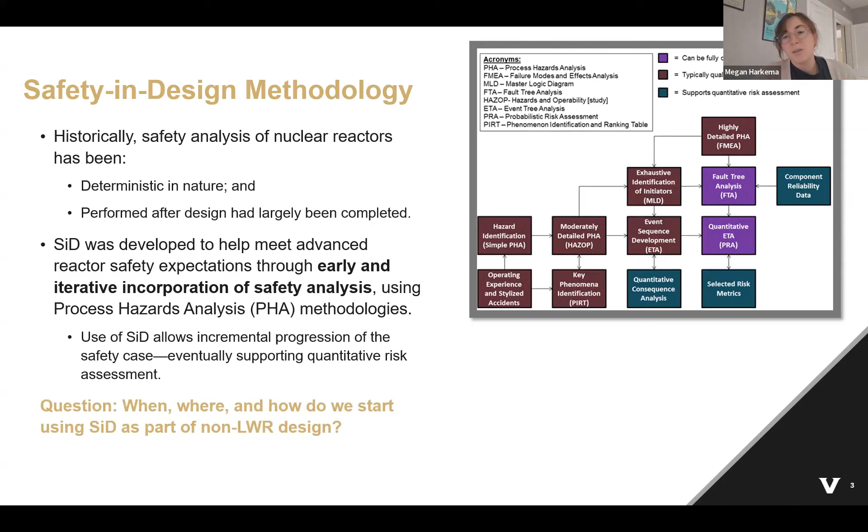But again, that begs the question of when, where, and how do we start, particularly for non-LWRs. I do have some related references here. Since this is going on YouTube, feel free to pause the screen and look at those references on safety-in-design if you are interested.

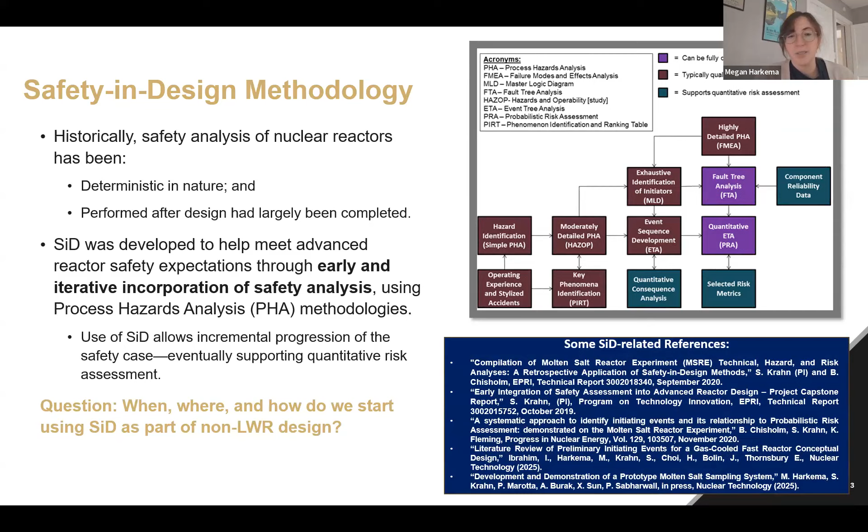So let's dive into the first question, which is when do we start? Our research has shown that there truly are benefits to starting as early as possible. But when we're starting early, we need to be thoughtful in our approach.

Process hazards analysis methodologies are the tools that we use to perform the SID method overall. They were developed for use predominantly in the chemical process industry as well as the aerospace industry, for systems that may not require a full probabilistic risk assessment. They were designed to be flexible and evaluate hazards and risk in different ways than we traditionally think about it for the nuclear industry.

However, all PHA methods are not created equally. We need to be thoughtful when we choose our PHA, particularly for analysis of a high hazard system at early phases of design.

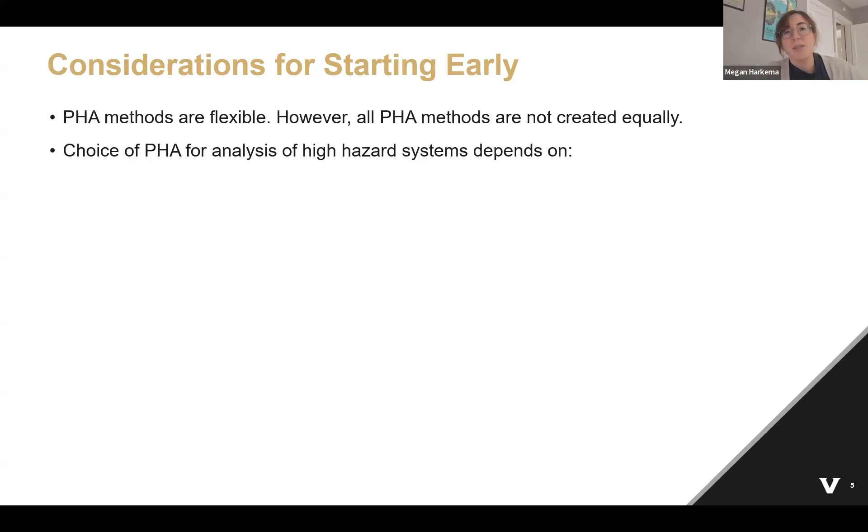In terms of the considerations that go into selecting PHAs, I've lumped them into two categories. The first being some of the logistical questions: what are our objectives, how many resources do we have available? Is this you sitting in your cubicle performing the evaluation, or do you have a team of design, operations, and safety analysts willing to collaborate and take as long as it takes? Do you have the appropriate documentation, the appropriate computer software to perform these evaluations? All of that really does end up impacting your selection.

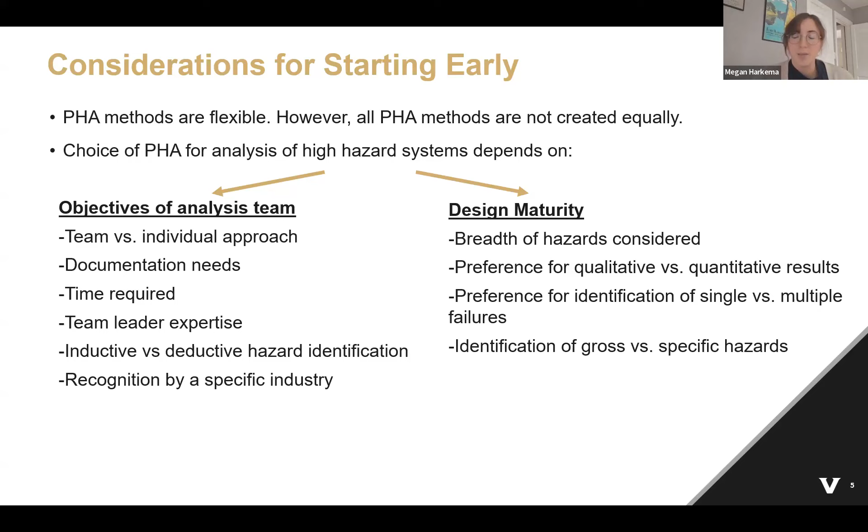What I'll be talking about in detail during this presentation is the second category of considerations, which has to do with design maturity. Depending on the design maturity in question, there are different breadths of hazards you can consider. There's a difference in your ability to gain qualitative versus quantitative results and insights. At an early stage of design, it's probably best to identify single failures before you move into identifying multiple or common cause failures.

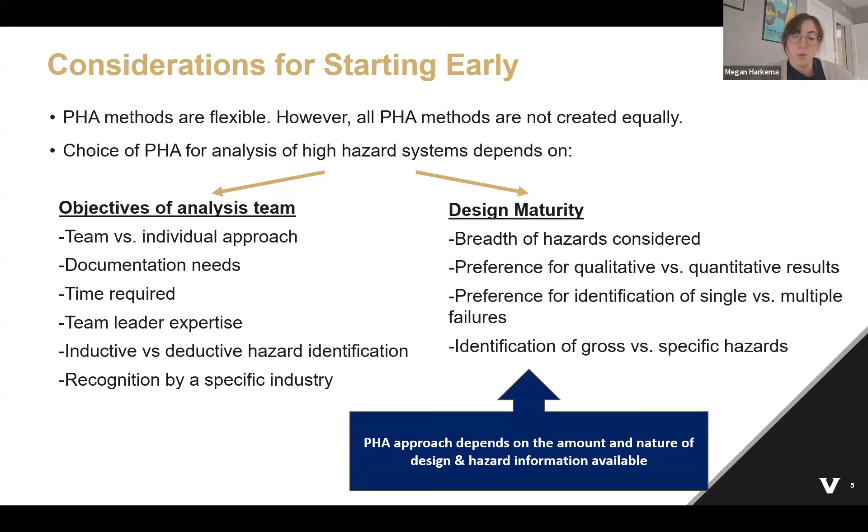So really what this gets us to is that the PHA approach we select depends on the amount and nature of design and hazard information we have available. But let's not forget this is intended to be an iterative process. If you don't solve all of your objectives in one go-around of implementing a PHA, that doesn't mean you can't consider them at a later stage of design.

At early stages of design, you can perform things like a what-if or a what-if checklist analysis, and get quantitative or qualitative understandings of your frequencies and consequences. As you mature, you can begin to use more and more rigorous tools to evaluate your system.

But that doesn't mean that even when you're integrating a simple process hazards analysis method into your safety analysis and design process, you don't need supporting information available. The easiest example is that if you want to perform a what-if checklist analysis, you need an appropriate checklist to do that. And let's be realistic, those may or may not actually exist in this day and age for advanced reactors.

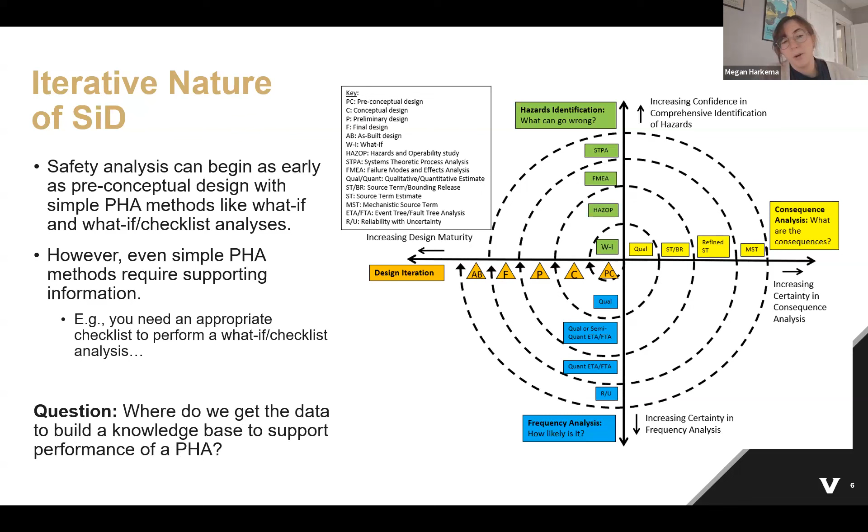So that gets us to our second question, which is where do we get the data we need to build a knowledge base to support the performance of a process hazards analysis methodology? My overall point, if you take nothing else home, is to do your homework here.

A lot of comments we get are, well, why are we doing safety analysis before we have the design specific data to do that safety analysis? The answer really is, well, there is data out there. You just may need to get creative in how you're using it, collecting it, and analyzing it to gain insights for the system you're responsible for designing. We've categorized data that can feed into the safety-in-design process into three different regions.

The first being operating experience data. This can be further broken down into historical operating experience or more modern operating experience. Secondly, there's stylized accidents—what we see a lot in the literature today, for example a Melcor analysis of a LOCA covered in a journal article or conference paper. And finally, there's relevant phenomenological data out there that can help us get a preliminary understanding of what phenomena might be of interest for our design.

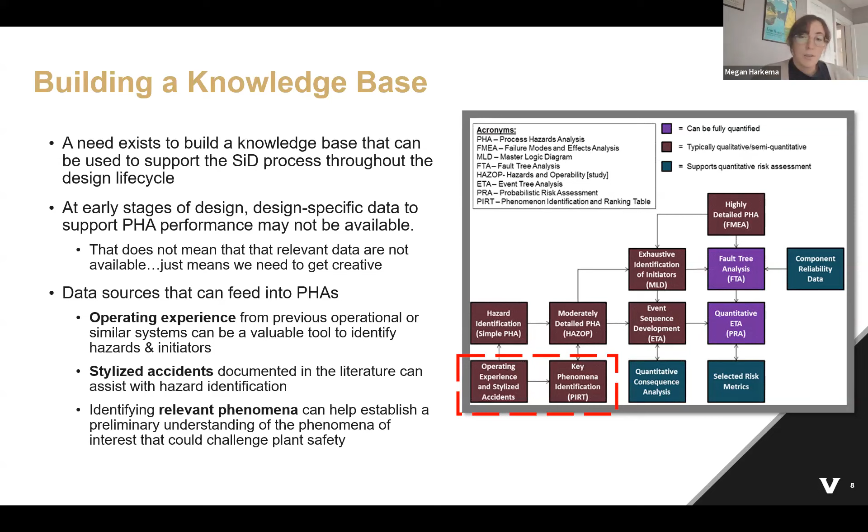Now I'll go into talking about these data categories in a bit more detail. The first one being historical operating experience. I would imagine most of us on this call are fairly familiar with the historical operating data that is out there.

From technically similar reactors tested at the Department of Energy and National Laboratory Complex between the 1950s and 1970s. What we've really seen in our research is that this reactor and test facility data and its documentation can be the most thorough manufacturing, construction, operational, and retirement experience out there for a given concept. But that does not mean that all historical data is created equally or that we're going to easily be able to access that data.

I want to spend a minute going over how exactly we can get access to this historical data, and I have these ranked from easiest to do to probably most complicated. We've had a lot of luck using web-based keyword searches, particularly at OSTI, as well as Google Scholar, for getting information about systems like the molten salt reactor experiment.

But for some other systems we've had to get a little more creative, going to component reliability databases. Some of those have been specifically built for advanced reactors, like the Sodium System Component Reliability Database, NaSCoRD, or the equivalent for molten salt reactors, MOSART. But we've also used generic databases like the Savannah River National Laboratory database.

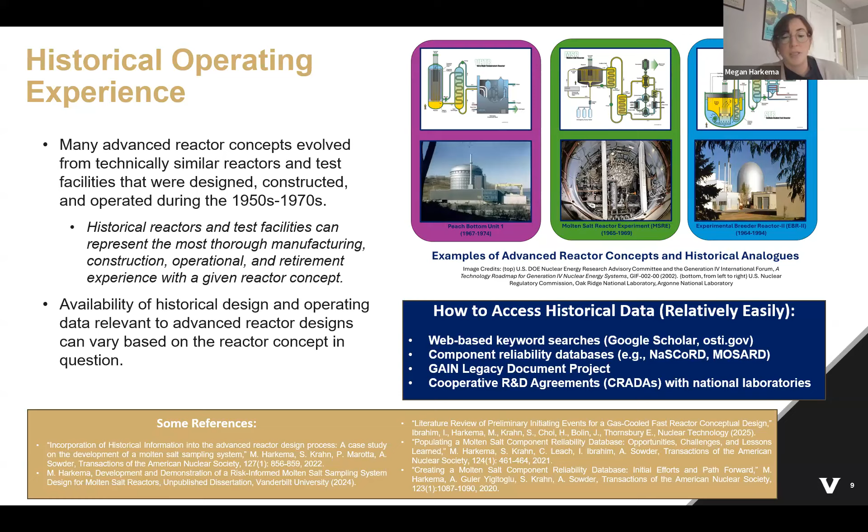But as I mentioned before, we do need to be careful using historical data, particularly if we're using it for our safety case. When we're using it in this way, we need to understand that what we're presenting in terms of our design and its performance will ultimately be sent to a regulator for their perspective and review. So we've identified a few factors we should keep in mind when designing a system and using historical data.

These can range from things like: how did you access the data? Is it publicly available? Was this system a one-off or was it well tested? And one of the most important ones for the safety analysis process is what is your understanding of the quality control and quality assurance processes used in collecting that data historically—was that QA/QC process documented? There are ways to retrofit QA/QC onto the data, developed out of, I believe, Idaho National Laboratory, and we can get you that reference if you'd like.

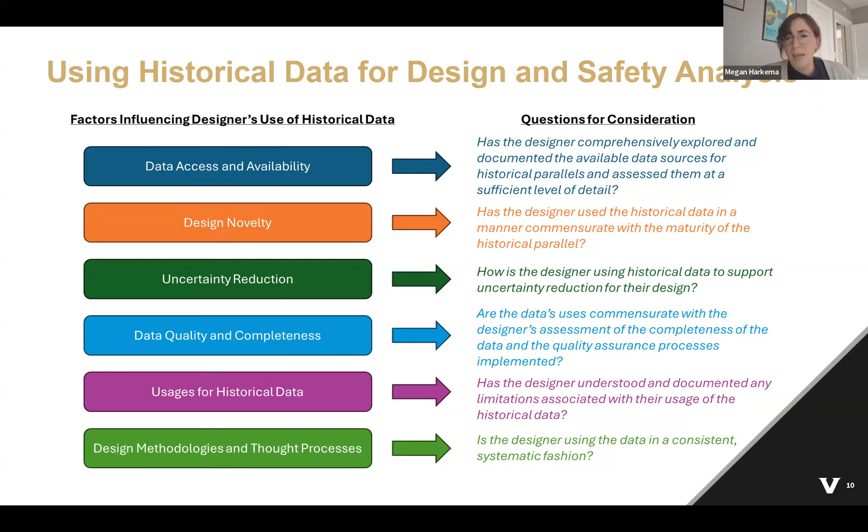But again, there are caveats here. Let's start with the easy one: if you're taking data from a quote-unquote technically similar system, similar does not mean the same. You do need to screen that data for relevancy to your design. We have done that previously using expert judgment as well as delta analysis if a more systematic framework is needed.

The other caveat, and this is something near and dear to my heart, is that if you're using data specific to your design that someone has been collecting, you need to actually go and collect and retain that data. So there's a need for intra-organizational collaboration and communication to make sure that the people developing a facility and actually running it are collecting data that you can use to support your safety case development and design development processes.

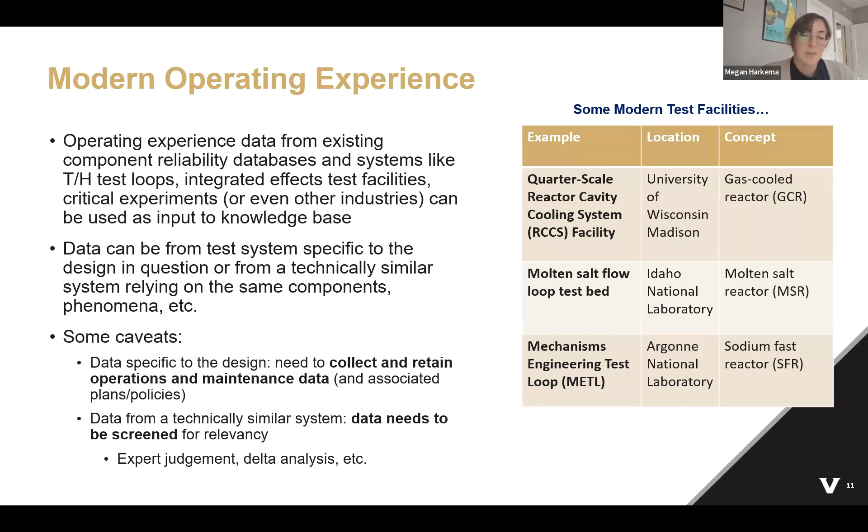The next category of data we have is stylized accident studies. I think all of us are probably well aware that there's so much stylized accident information out there in the literature for light water reactors and for a variety of advanced reactor concepts.

What we've previously done with this data is use it in an aggregate form. Although it's not a substitute for comprehensive initiating event identification, collecting this information comprehensively can help us understand undesirable events and how they propagate within our system, which can ultimately be used as part of the rationale presented to a regulator for the comprehensiveness of your initiating event identification process. The thing I really want to drive home is that this is not a trivial process, just because of the wealth of information out there.

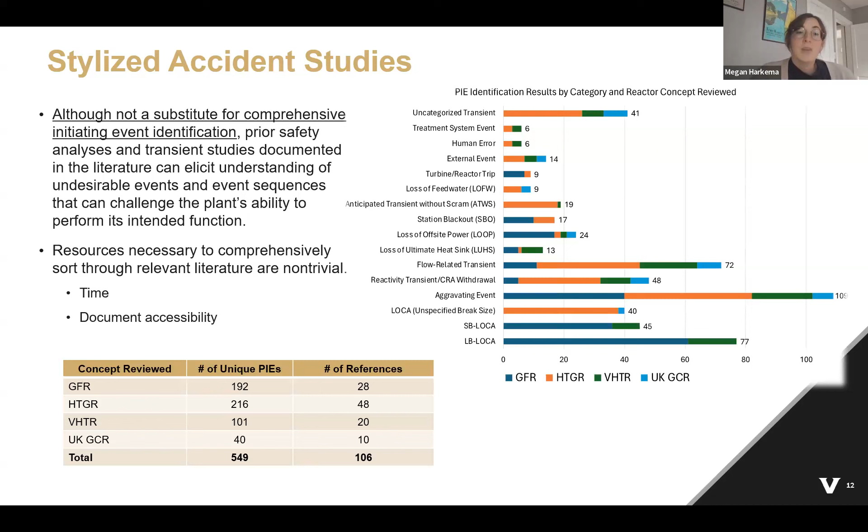It helped us streamline our safety analysis in the future and determine which systems hadn't been evaluated very well in the literature to date. But it is a pretty resource-intensive process.

The last category of data I'll discuss is phenomenological data, and I will also plug Brandon and Steve here for just a moment, being that they have previously put out information on the importance of considering phenomena specific to advanced reactors.

One good example here is the potential for flow reversal in passive decay heat removal systems. Obviously this can be considered in AP1000s as well, but it's something that may not necessarily have been considered for light water reactors traditionally.

What we've seen in implementing the safety and design process is that PHAs are great for organizing phenomenological data into event and accident sequences. But in and of themselves, they're not necessarily designed or well suited to identifying phenomena from the get-go. So this is where we pull in tools like phenomena identification and ranking tables to help us consider low-level phenomena.

But again, at an early stage of design, we're not saying you have all the data you need to actually go out and perform a PIRT. There have, however, been a wealth of PIRTs performed in recent years for almost every advanced reactor concept being considered, and those may be generally applicable for adoption at early stages in the process.

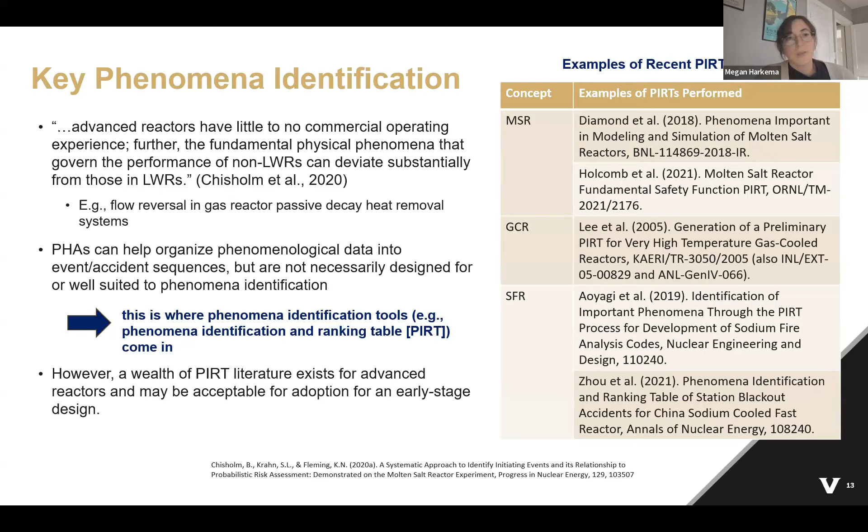All right, last question, and hopefully the most interesting of all of this: we have all of this data. Now, what in the world do we do with it? How do we use it to risk inform?

In a perfect world, I would have time to discuss in detail two different case studies that show you just how different this process can look based on your objectives and the environmental context you're working within. However, this is a 40-minute presentation, not an 80-minute presentation on this beautiful Friday afternoon, so I will go into detail on one of these.

But before I do so, I do just want to mention again the work we did as part of the General Atomics FMR project. In that case, we were evaluating an entire reactor.

Our goal was to develop an initial safety case for the reactor as a whole, and we were working within a historical context that was a bit different, in that no gas fast reactors have been operated. But there's a moderate wealth of experience out there for gas-cooled concepts generally, and also the passive decay heat removal systems being studied for gas-fast reactors have also been considered for advanced light water reactors.

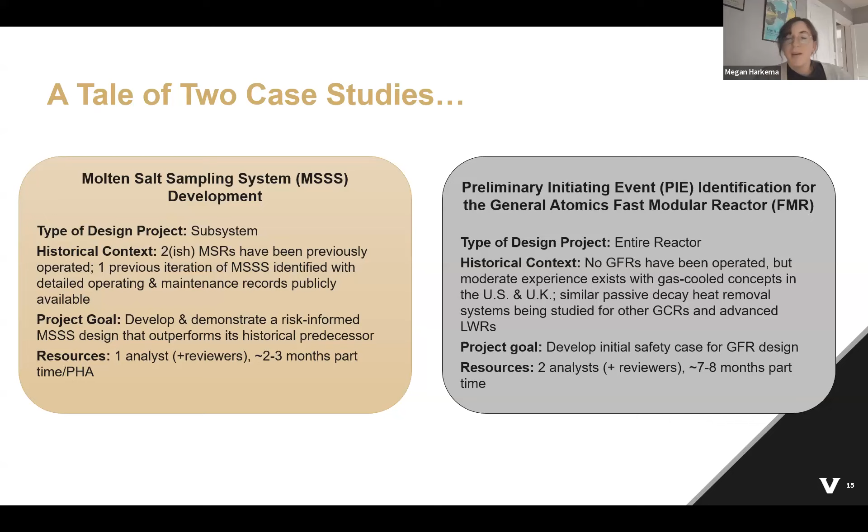And the resources we had available were two analysts, i.e. grad students, one of which was me at the time. We were able to dedicate about 7 to 8 months part-time to each of the PHA evolutions we performed, with a host of reviewers available to help us there as well.

The case study I'm actually going to focus on was my dissertation research, which was the development of a molten salt sampling system, or MSSS, for use within molten salt reactors generally. This project was funded by the NEUP program with the overall goal of developing and demonstrating a molten salt sampling system that outperforms its historical predecessor.

So instead of a whole reactor, we're looking at developing a subsystem. We have a bit different historical context. There were approximately two molten salt reactors, depending on who you talk to, that have previously been operated. And there was one previous iteration of the MSSS that we identified, and we found detailed operating and maintenance records, which informed our process. So in that case, we had one analyst performing about 2 to 3 months part-time per PHA evolution that we looked at.

We performed three iterations of the safety analysis process as part of MSSS development. The first was a STAMP-based analysis of the historically similar system. Then we moved on to a failure modes and effects analysis of our conceptual design. And then finally, we were able to develop what we like to call a semi-quantitative fault tree for our as-built prototype.

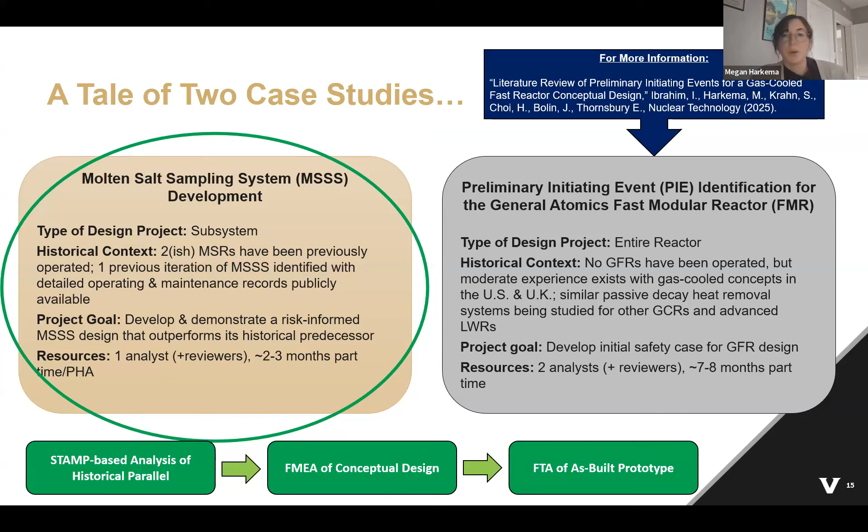But before I go into that, obviously the focus of this presentation is on the safety analysis process. But if you're anything like me, trying to move forward without understanding what in the world is an MSSS and why do we need one would be difficult. So I'll spend a few minutes just talking about what exactly is a molten salt sampling system.

Molten salt reactors are molten salt fueled or molten salt cooled reactors. The benefits they provide include higher heat removal or higher temperatures that allow for increases in efficiency and different deployment flexibilities, as well as potential safety and safeguards improvements. But molten salt reactors are sensitive to a few different chemical and isotopic considerations, predominantly given the liquid form of the fuel in question. So it becomes important for us to understand, predict, and control those characteristics.

Particularly within first generation molten salt reactors, experts perceive that this will require periodically removing small grab samples of salt, testing them for things like fissile and fertile consumption and production rates, fission product concentrations, contaminant concentrations, redox conditions, to make sure that your system is within its operational envelope.

The MSRE, which operated at Oak Ridge between 1965 to 1969, used a system called the sampler enricher to do this. But as I'll get into in a bit here, that system's reliability, as documented in the MSR program's semi-annual progress reports, was insufficient for us to directly incorporate that design into modern MSRs, motivating the NEUP project that we got to work on.

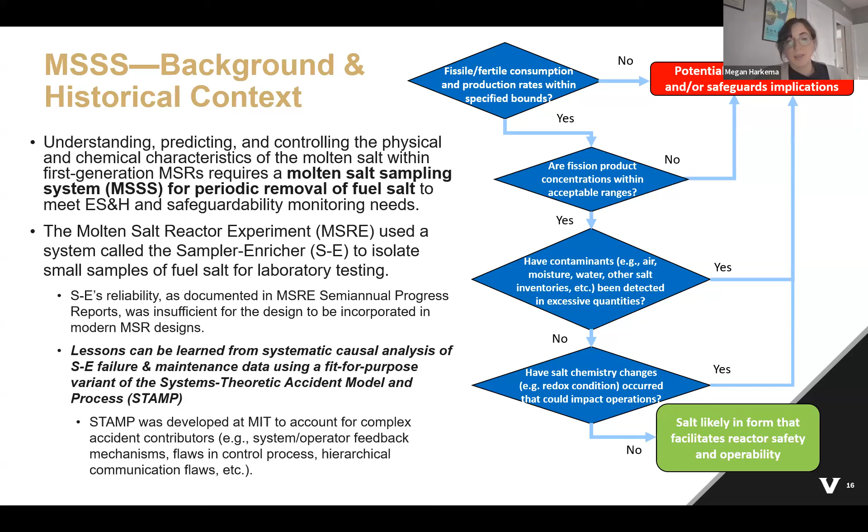When I was referring previously to the sampler enricher's performance, I think it's useful to spend a bit of time saying what exactly we mean by the system was insufficiently reliable. Within those MSR program semi-annual reports, we were able to tally up 744 total sampling evolutions that had been performed over 4 years, with the bulk of those being removing small amounts of fuel salt for laboratory testing.

Some of those evolutions were to actually add fresh fuel to maintain reactivity within the system. So this system operated, I guess I would say in my own personal opinion, quite poorly. So much so that the MSR program directors commissioned a report purely on the sampler enricher's performance at the end of the MSRE's operational period.

However, the project management description is a little more optimistic than my own, saying, quote, the system required some minor repairs. However, when we looked at this in detail, we were able to identify 64 different occurrences for this very small subsystem in, I guess, small reactor, which equates to more than one occurrence per month for the system, twice requiring the shutdown of the reactor to resolve.

In response to that, there were approximately 140 individual corrective actions performed. But alas, not all of these were successful.

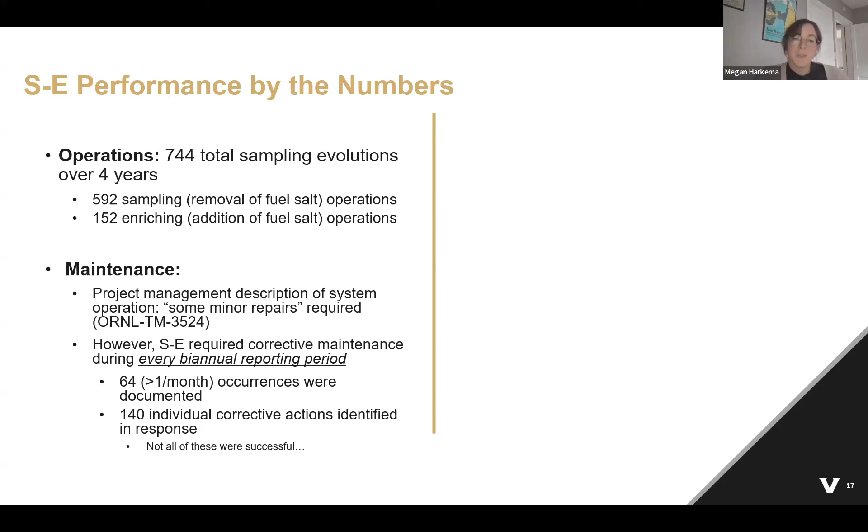I want to bring this back to the risk-informed, performance-based standards guidance document that ANS put out. They listed a number of attributes for a risk-informed process, and one of those is the use of thresholds or criteria to examine system performance. We received a qualitative requirement for this criteria from DOE-NE when we got the project, which was achieving a higher degree of reliability than the historical system. But we were able to use the evaluation methodology we did to turn that into a quantitative insight here.

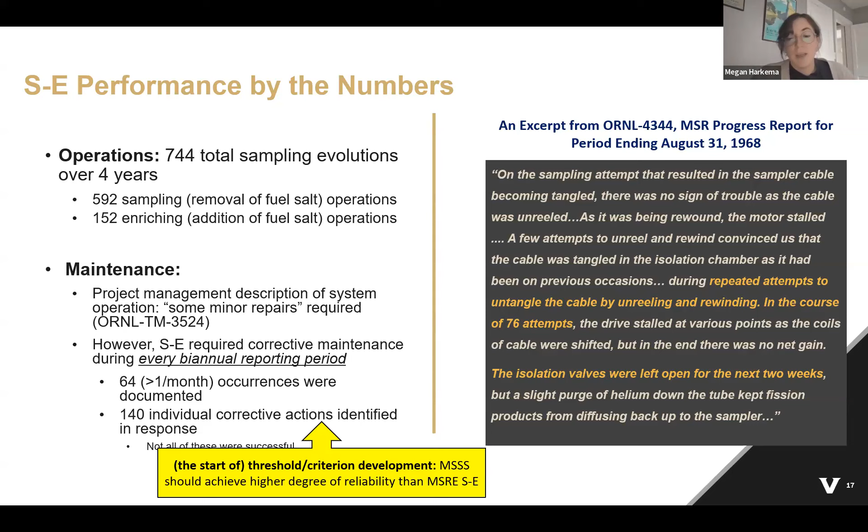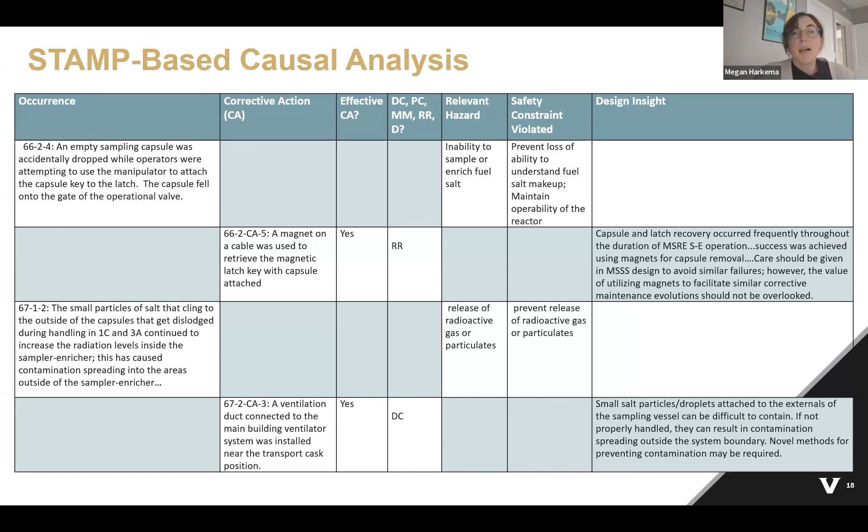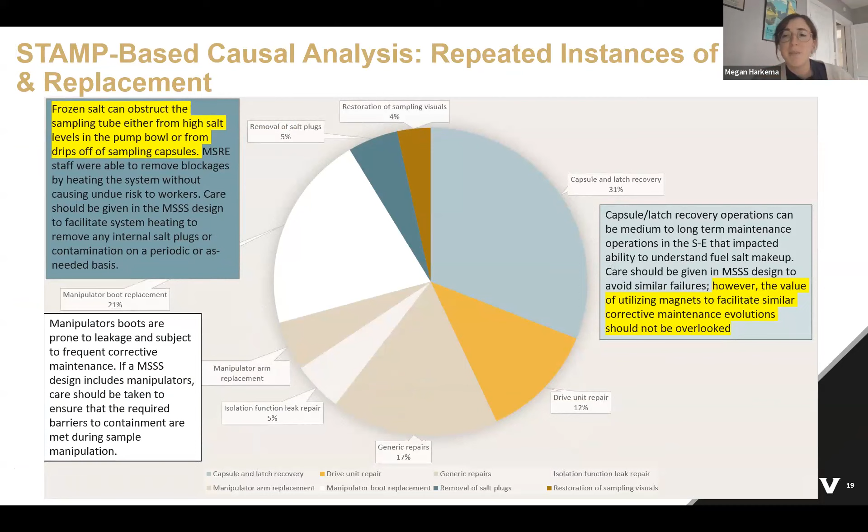That led us to analyze the frequently credited repair, replacement, and design change evolutions for further design insights, which is what you see in this breakdown of repeated instances of repair and replacement here. To save time, I'm not going to go into details, but the insights we gained allowed us to pull failure modes into the later-stage failure modes and effects analysis performed on our conceptual design, as well as giving us insights into how we could design effective mitigation and recovery mechanisms for our system.

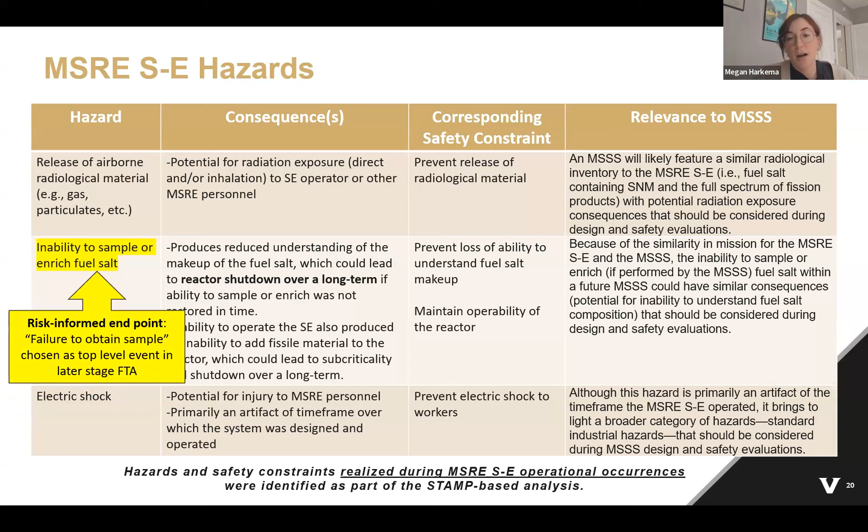Moving into the middle ground work we did, which was the failure modes and effects analysis of the conceptual design. Here's an example of some of the results we got from this evaluation. We identified over 331 total failures for what is realistically a pretty small system within a molten salt reactor generally.

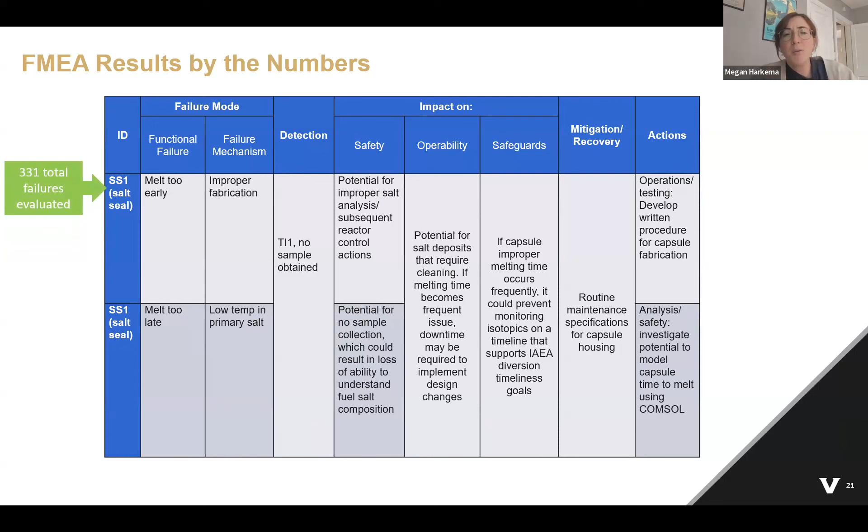From a risk-informing perspective, I want to focus on the use of these other columns in your failure modes and effects analysis to gain insights. The first is an aggregate examination of detection and mitigation or recovery mechanisms. If you look at where you have frequently credited detection, mitigation, and recovery mechanisms, that can tell you where you need those mechanisms to have a high degree of reliability, and where you might need to diversify the mechanisms you're using.

One example that's easy to discuss is if your detection mechanism is 'no sample obtained,' which it was 10 times for us. That means you're getting all the way through the sampling process before you realize a failure occurred in your system. So we went back and made design changes to allow us to differentiate between failures that could lead to no sample being obtained.

The other place where we can gain good insights from a PHA is the resolution of action items, and we identified 58 of them on our conceptual design. These can range from things like developing procedures or better defining the operational envelope, to performing a multi-physics evaluation of your system to better characterize its performance before you move on to testing.

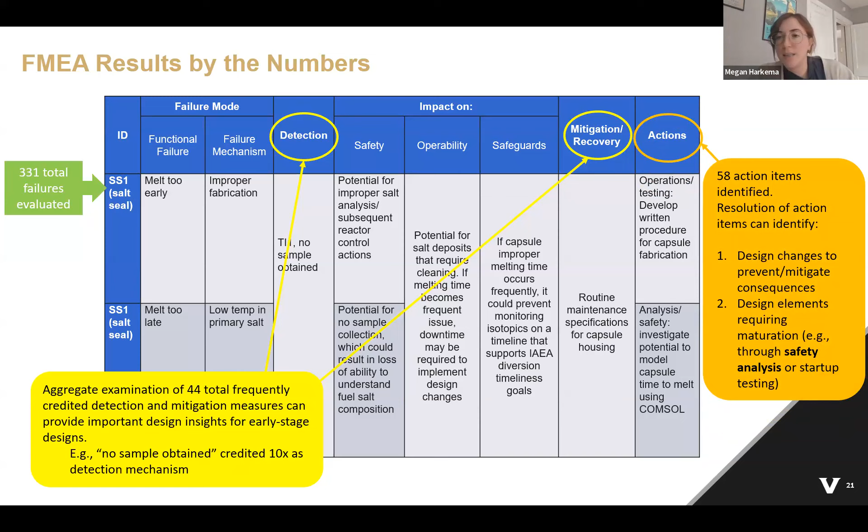I'm almost done now, I promise. The testing approach we used was multi-phased and allowed us to increase in relevant hazards being realized. On the left is our conceptual design that we were able to translate into a few different prototypes.

The thing I want to focus on here is how we used our testing to better understand the failure modes that could happen for the system and how that could lead to the overall top event of failure to obtain a sample. We had these different branches you see on the bottom that we were able to decompose, but the one I'll focus on in more detail is the freeze port branch that we developed and tested.

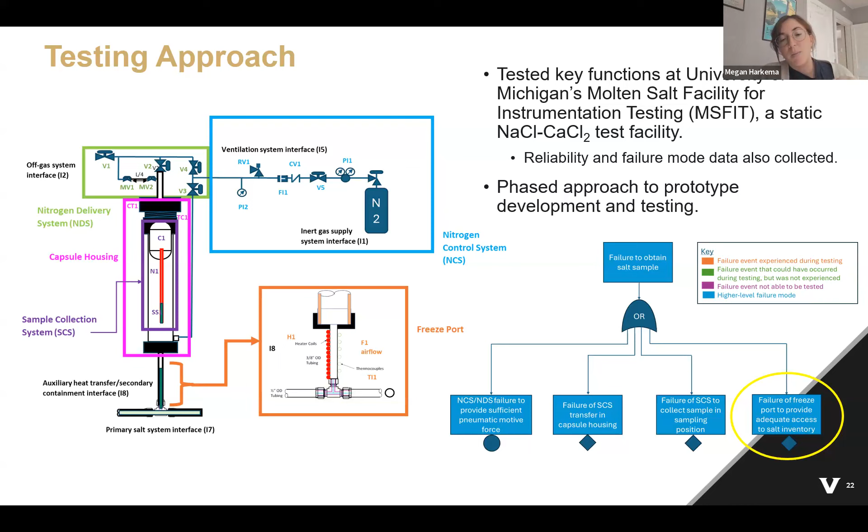A freeze port is similar to the freeze valves being considered for use within molten salt reactors, in that it's an alternative to a traditional electromechanical valve where a frozen section of salt acts as the closed valve, and you use heaters to heat and melt it when you need to open the valve. We call this a port instead of a valve because in addition to fluid flowing through it, we're also passing our sampling equipment through it so it can access the bulk salt underneath to get a representative sample for our evaluation.

We were able to create the freeze port test bed you see on the right-hand side here at the University of Michigan's Molten Salt Facility for Instrumentation Testing, or MSFIT, which for any of you who have worked with molten salts know is a very appropriate name for this facility.

This test bed allowed us to test a few different important areas for our freeze port: first, can we pneumatically control the level of salt in the port when it's in the open position, and second, can we use the thermocouples placed at different spots to determine when the port has been frozen?

This whole process occurred in, I believe, January of 2023, and we were able to test the system 2 times. Now, I'll be completely candid here—our goal was originally to test on the order of 10 to 20 times, but this was a COVID-impacted project, so we had to work with what we could. But the thing I want to drive home from the risk-informed perspective is our testing evolution allowed us to identify additional failure modes and start collecting some reliability-related information that we can bring forward.

We did this by creating a semi-quantitative fault tree where we went through and tallied the failures we had, with 2 overall sampling evolutions. We're not going to go through a full quantitative evaluation here, but what's helpful is we were able to color code this fault tree to show whether a failure event could have occurred during testing but didn't, could not have occurred during testing, or actually did occur during testing. This allowed us to start expanding this process in a way that will build toward a later stage safety case.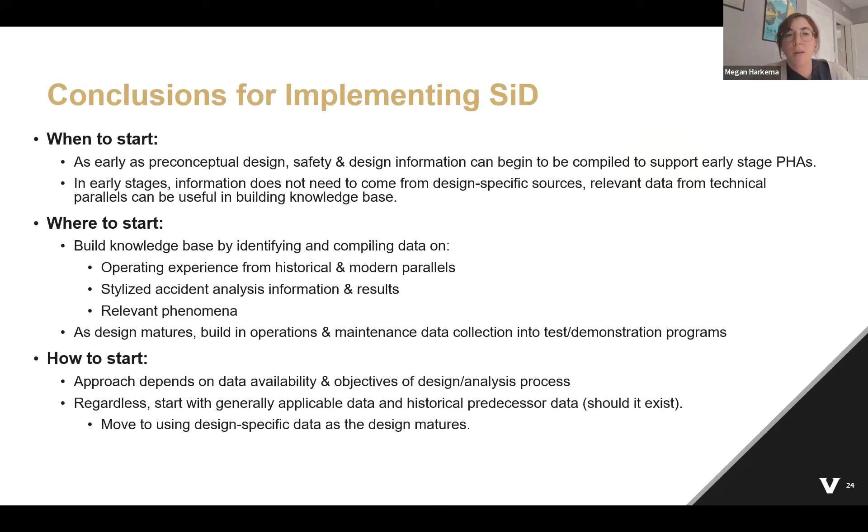Checking time, just to conclude quickly with some overall observations for implementing safety in design. When to start: as early as preconceptual design, we can start compiling information and performing early stage process hazards evaluations. At this point, our information does not necessarily need to come from design specific sources.

We can use relevant data from technical parallels to assist us. In terms of where to start, building a knowledge base that helps us in both design and safety analysis is important. This data can come from operating experience, stylized accidents documented in the literature, and relevant phenomena data, whether identified ourselves or relied upon from similar systems.

As we mature our design, we can build in operations and maintenance data collection into our test and demonstration programs to continue developing our safety case. Finally, how to start: we need to tailor our approach to the data availability and our objectives. But regardless, we can start with generally applicable data, working with high level hazards, and moving into more rigorous processes, using design specific data as our design matures.